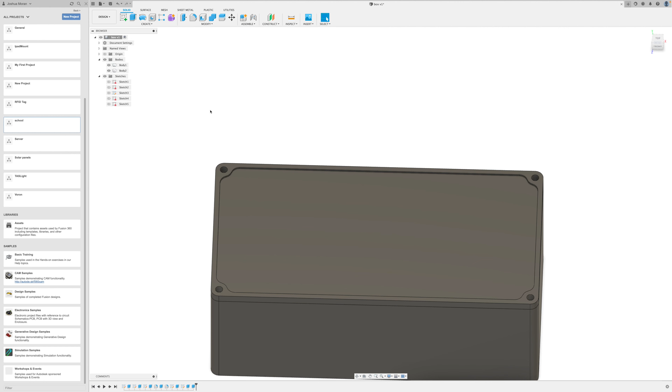To do this, we're going to need to start by disabling the visibility of our bottom section. This means we can freely work on it on the top. We can click and hold on our view cube, drag, so we can see this. We are going to need to draw a new sketch.

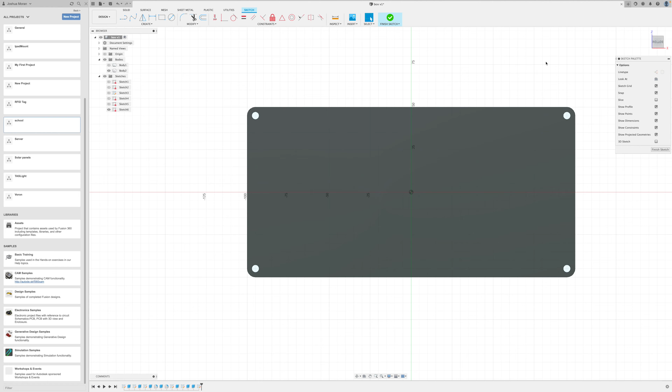Now, to make this easier, we're going to use the tool we used before, project. We're going to grab our view cube again, we're going to rotate. We can actually do this in the sketch, so now we can see the other side. We're going to go S, and then type in project. And we're going to project this shape, as well as this shape. This means that we know where we can put our seal. This makes it a lot easier when we're designing it.

Next, what we need to do is calculate where our seal is going to go. To do this, we can use an offset. We want to offset this 2 millimeters, like this. Perfect. That's a bit close to the edge, so we might actually step that back to 1.5. That looks pretty good. We can push enter.

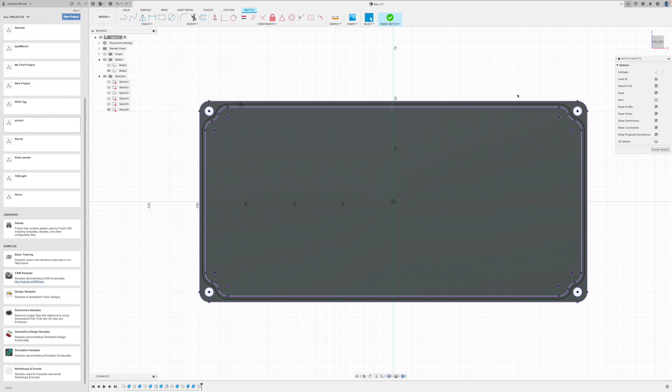We will use this later as a path. So this will mean that we can run our rubber that we want to put in along this path. You'll see what this means in a minute. We can go finish sketch. We're not going to do any extruding right now, but we're going to do some in a minute.

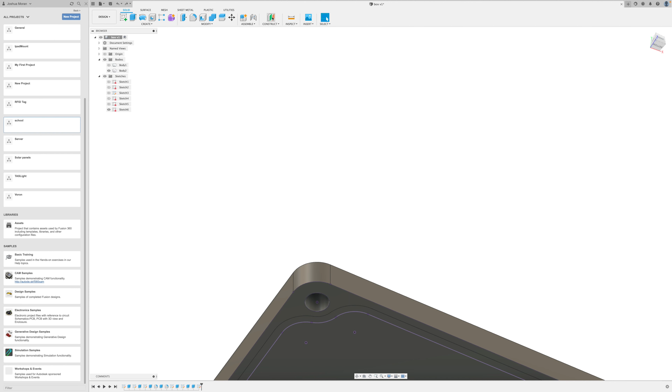What we're going to do now is create what is called an offset plane. This means that what we need to do is create a profile. This means it'll intersect properly. We can come up here where it says construct. You'll see this icon here, offset plane. We click on this, then we click on this shape right here. This will add a big yellow square.

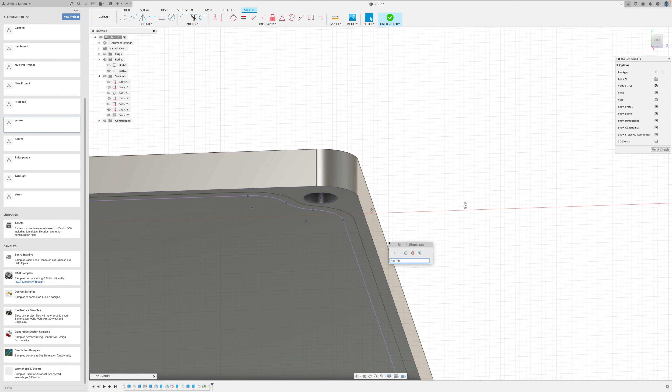Now we can click on this. Now we can drag this until it intersects somewhere on this black line we just put in. When that's done, we push OK. Now we can create another sketch. We do similar to what we did before. We come S, project. We project our line. Okay, now we can come back to where we were.

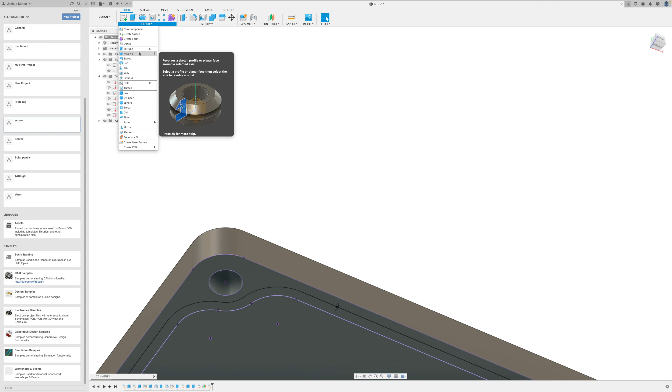Now that dot is the line we made. We can come here with our circle and create a 1 millimeter circle there. Okay, and finish sketch. Now you notice our circle is halfway along the line. Now we can come up to our create menu, where we're going to create what is called a sweep. This takes this profile, which is our circle we have here, and runs it along the black path we just made. We can click sweep, click on our circle.

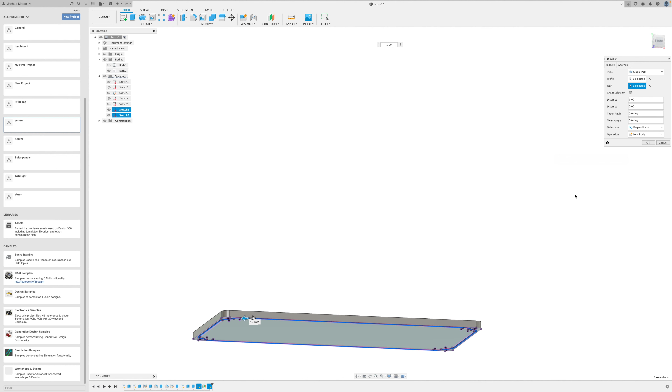Then we come up and click on this arrow here, and we select this being our path. You'll see now we have a blue outline. What we want to do here is where it says cut, we want to change this to new body, like we did with the lid. This is going to create a new component.

Finally, what we need to do is get back into position, and we need to cut a slot out of the lid for it to sit in. Before, you notice we had the cut option, but had we done that, we wouldn't have had the profile left to work with. So what we can do, we can use the combine tool. If we push S and type in combine, and click this blue icon here.

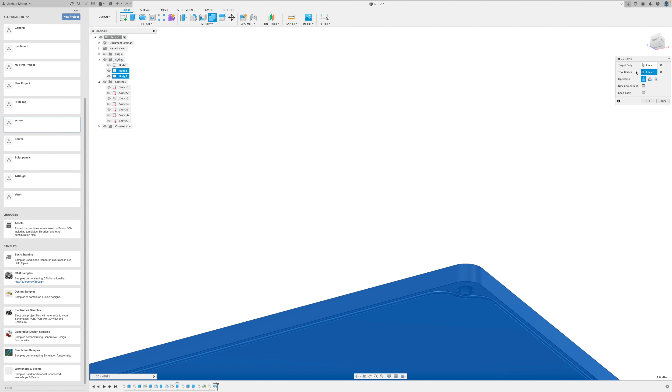Now, for target body, we select this great big thing here. For tool body, we select this. We can click cut, and you'll notice it creates this thing. But it is very important that we click this box here that says keep tools. What this means is that the top body will have this cut out of it, but it will not throw away this tool. So we will still have our rubber seal here. We can push OK. And now you'll notice if we disable visibility, we have a channel.

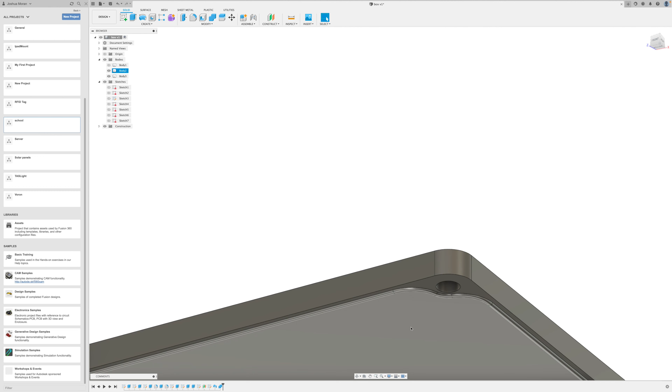And we have this. The last thing we can do is change the materials of our lid. This doesn't affect the actual CAD, but it makes it a lot easier. So to do this, we push the S key. Now we can type in material, and we click this little icon here that's got the checkerboard pattern.

Once it is loaded, we want to come to plastic, and we can look through the plastics we can decide we want to use. In this case, we might want to use, say, PVC plastic, some random opaque plastic, polycarbonate. We have a lot of options. In this case, we're going to use ABS. So we scroll up, we click on ABS and we drag it. We do the same to the lid as well.

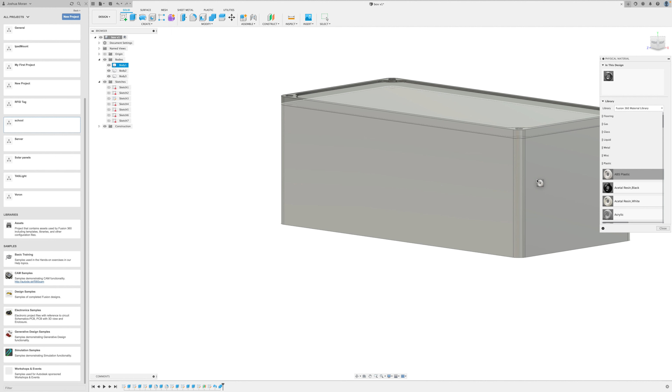The other thing we can do, we can toggle the visibility of the lid and we can change the material of our seal. If we scroll down in here, we will find silicone. The reason we want this, or rubber in this case, the reason we want rubber is this means that we can create a weather-resistant seal for our box. This is great because it means that if, say, water comes, this rubber will stop the water from getting in to a point.

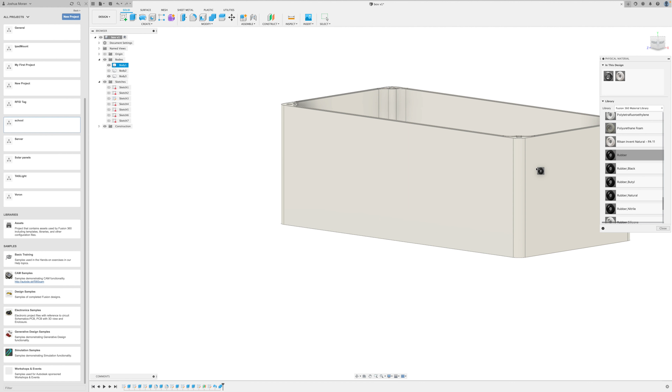We can click and hold on this and drag it, making sure very carefully that we select it. In this case, it's really hard, so what we can do is toggle visibility of our box, so we can just click and drag onto this. Now if we re-enable the visibility, you'll see we have a black rubber seal and we have a box.